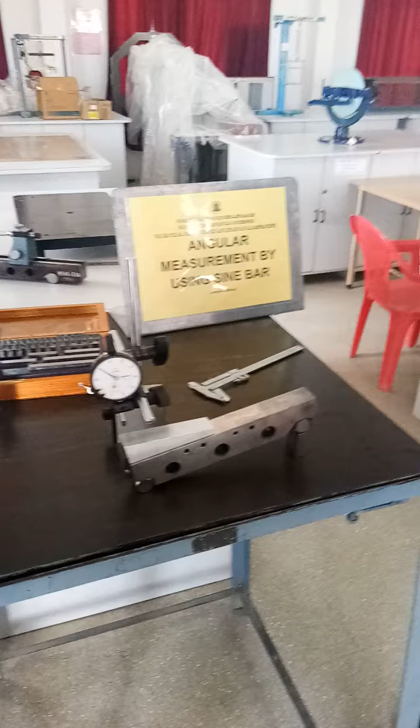Okay, so in this experiment what we are trying to do is angular measurement using sine bar. So this is your sine bar. So the apparatus required are the sine bar, the dial gauge and a wedge component. So this is the wedge component. So you can see the inclination here. So this is the shorter side, this is the longer side, but then this becomes the length.

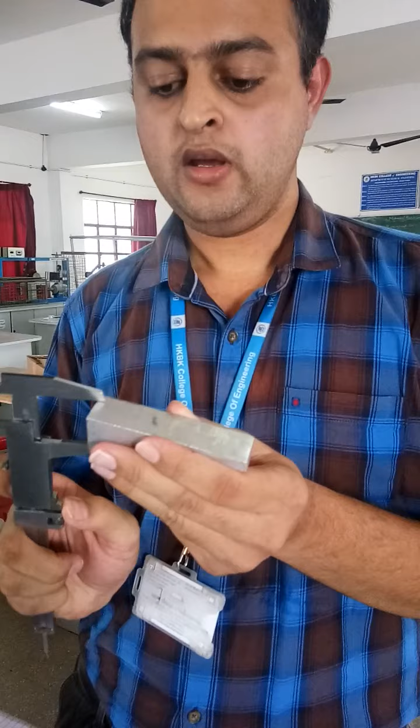So using vernier calipers I will measure the height h1 of the wedge component, h2 of the wedge component, then the length. So this is the wedge component. Okay, so this becomes my height h2, and this becomes h1 at the end. So then this becomes the overall length. So the overall length is measured. So this becomes the overall length.

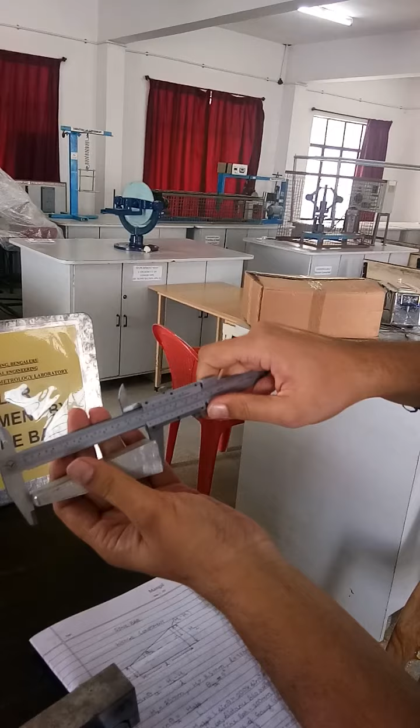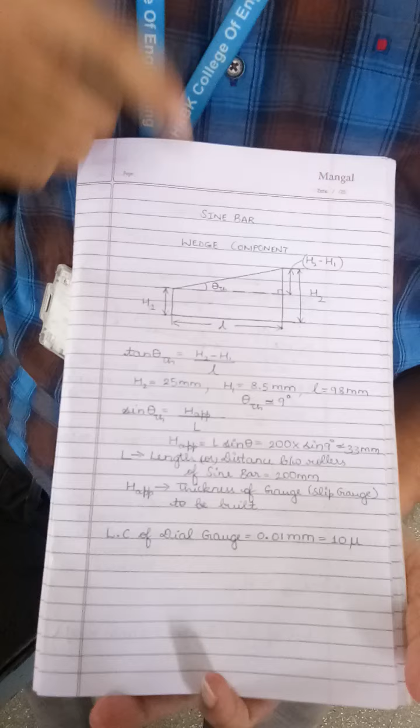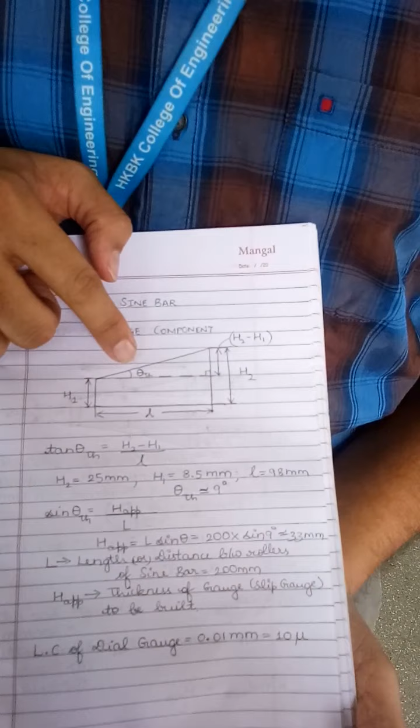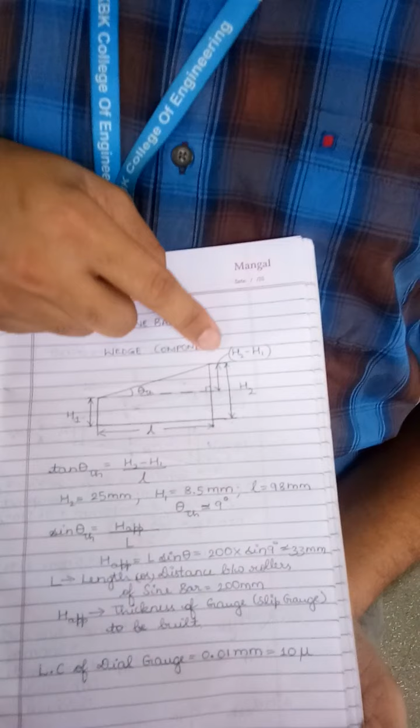So when you try to do, you will obtain the values of h2 as 25 mm, 8.5 mm for h1, and length of the specimen will remain 98 mm. So now you can see the diagram here. Okay, so the first step we are going to do is we are finding theta theoretical value. So how will I find out that? By taking tan theta. So this is right angle triangle. So this side is nothing but h2 minus h1. So opposite by adjacent. Adjacent is nothing but the length of the component.

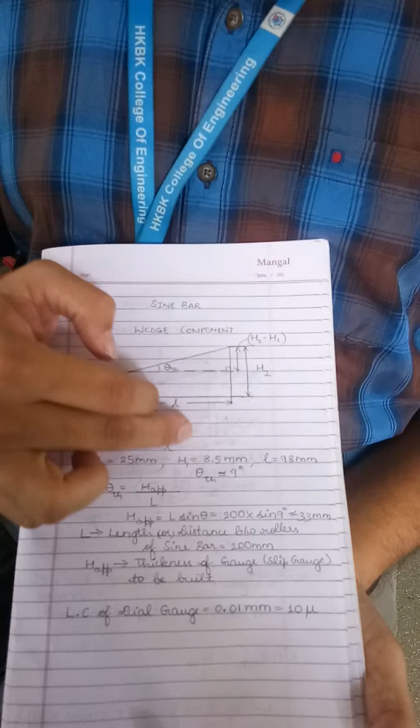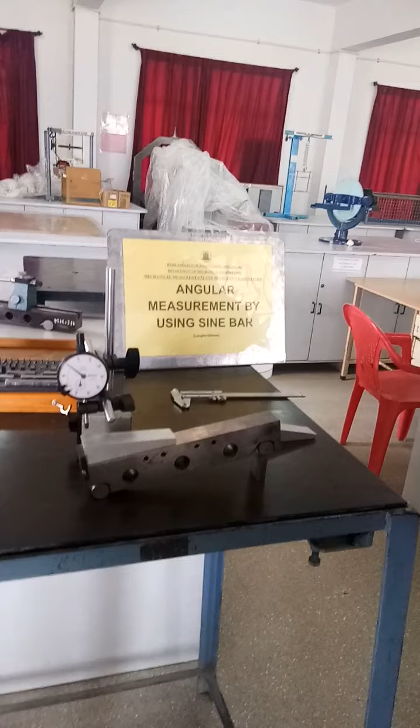So then I have this theta theoretical. By substituting all the values in this formula, h2 minus h1 by L, I will have theta theoretical value approximately equal to 9 degree for this wedge component. So now I have to verify this experimentally using the sine bar apparatus. You know that there are two rollers for the sine bar. Relief holes are provided to hold the sine bar. So you know that slip gauges are to be provided at one end to make the surface flat.

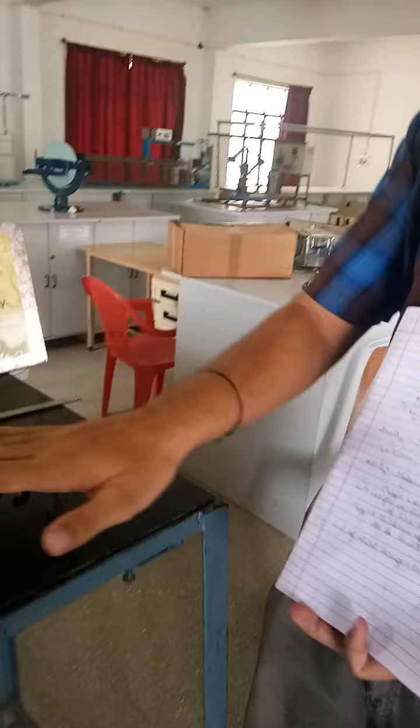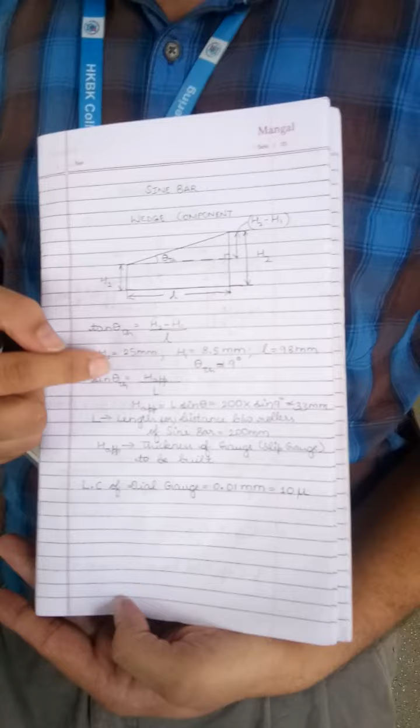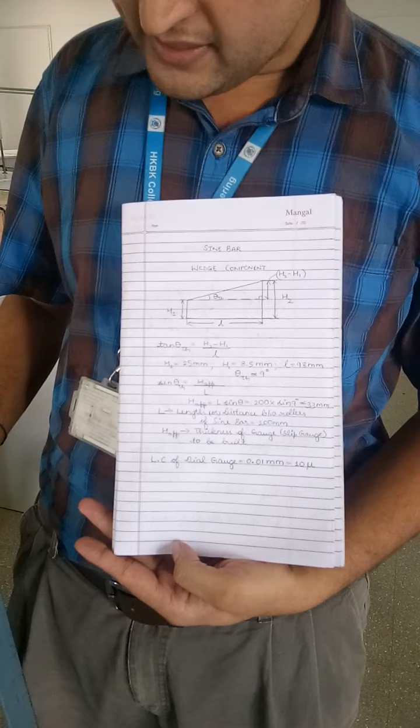Okay, then we will be using the dial gauge to check the evenness or the horizontal parallelness of the specimen. So now I have to build this h approximate, that is the approximate slip gauge thickness from the theta theoretical value found out. So now how will I do that? I will just substitute this theta theoretical value in this equation, wherein I will be knowing the slip gauge height. H approximate is nothing but the slip gauge height that has to be built.

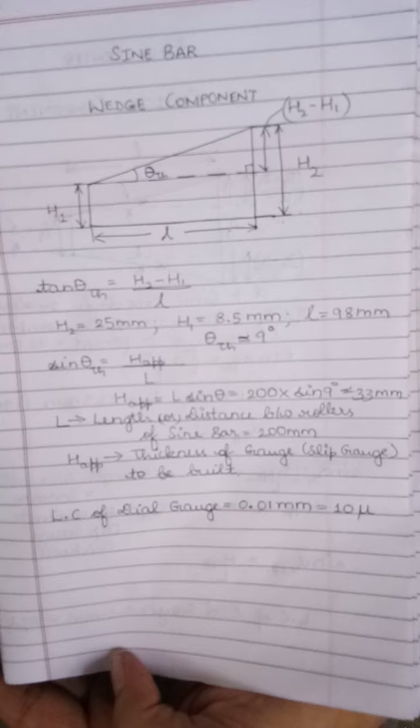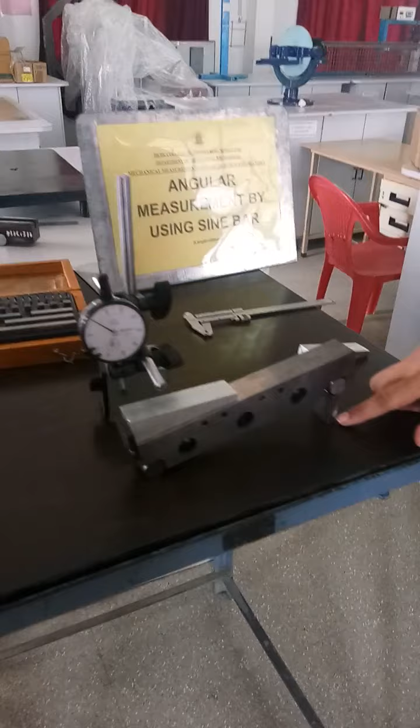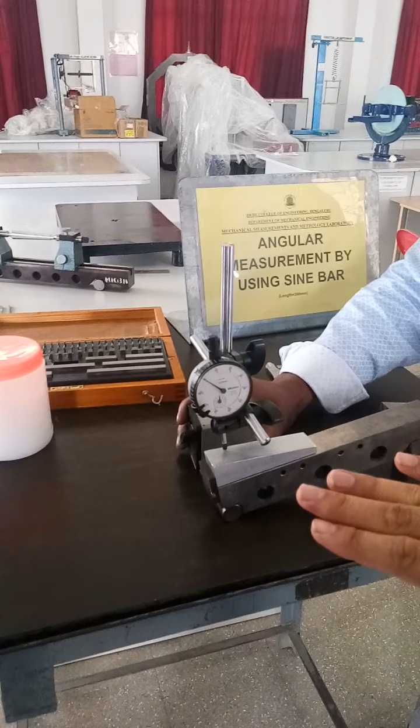L is the distance between these two rollers. So that is fixed. For the sine bar, the roller distance is 200 mm in our case. So we will be substituting that. Then finally we will get 33 mm as the answer. So we have already built the 33 mm thickness here, the slip gauge. So now we are going to just check with the dial gauge. So make sure that the dial gauge keeps running evenly on the surface and the error is between 0 to 10 divisions, so that our answer is correct.

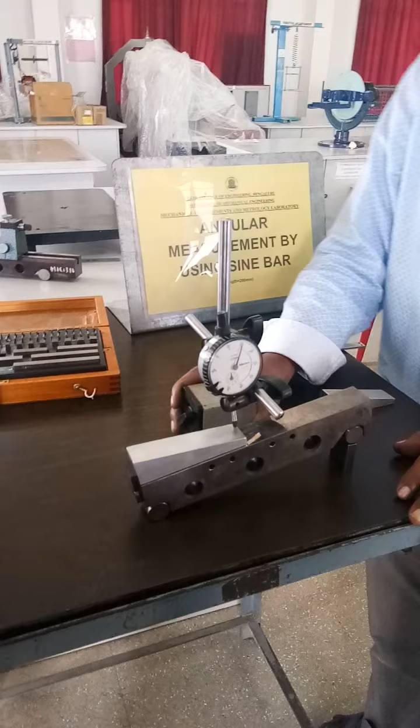So the least count of the dial gauge is 10 micron or 0.01 mm. So the reading should vary between 0 and 10. It says that our procedure is correct. Thank you.

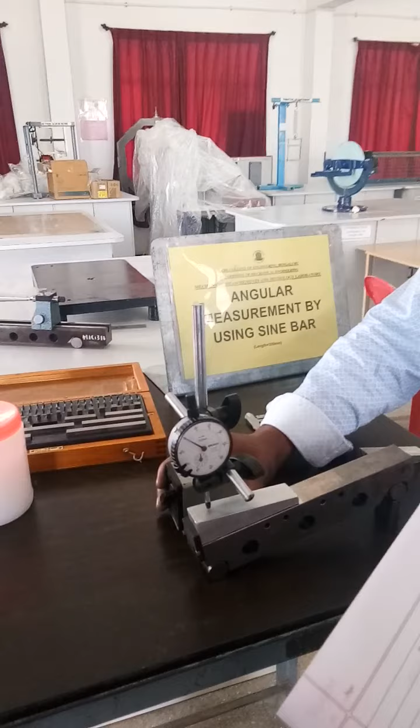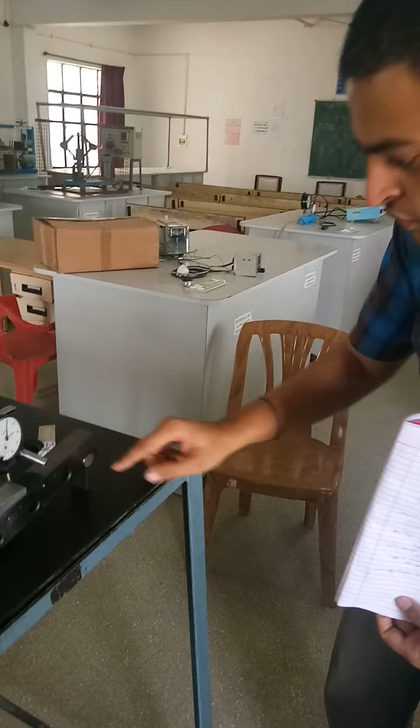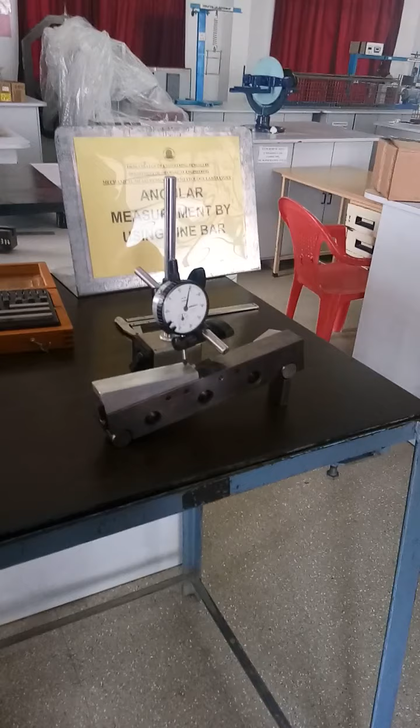We are just doing the trial and error method, so that the divisions will not go beyond 10. The deflection should be between the 0 and 10 divisions of the dial gauge. So now we have the sine bar. So this is nothing but the h approximate which we have built. So this is the angle theta. So this is how we find practically the angle theta. So this is one right angle triangle. So we can find the theta experimental from the setup once the dial gauge reading is between 0 and 10.

Okay, so this experiment is almost similar to the sine bar. So we are using the sine center. So we have a conical component, so you can see that this is the conical component. Okay, so it is circular in shape. So you have different diameters. The diameter varies. So call this side as D2 and this side as D1. So now we have this to hold the specimen. Since this is not a wedge component, it won't remain flat on an inclined surface. So we have these sine centers to hold the specimen in place.

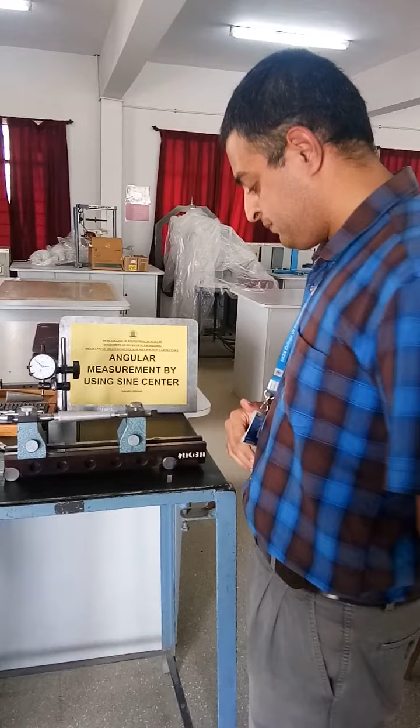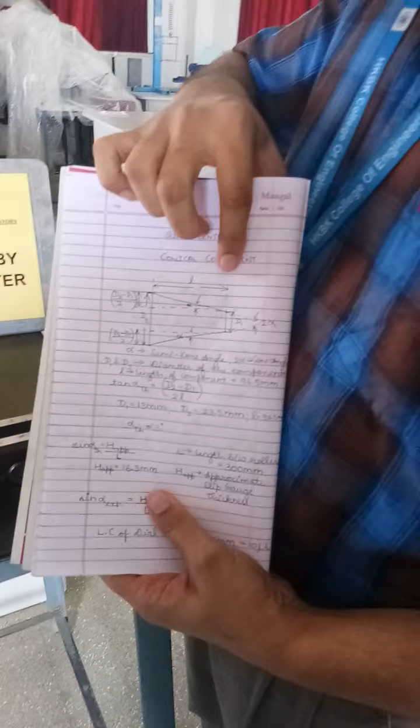So now similarly we have to first note down the dimensions of the specimen, D1, D2 and length of the specimen. Then we have to note down the distance between the two rollers. It is similar to the previous procedure whatever we have followed. So this is the conical component. L will be the length of the conical component, D2 will be the longer side, D1 will be the shorter side. Here alpha is called the semi-cone angle, 2 alpha is called the cone angle.

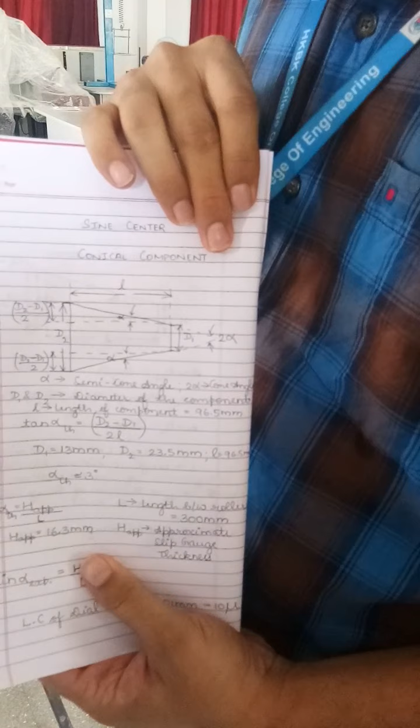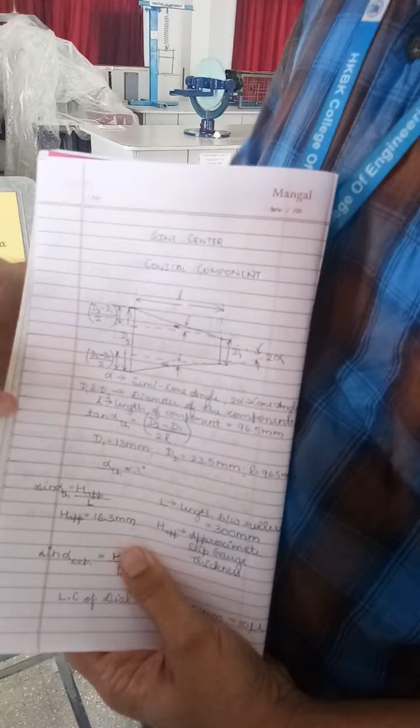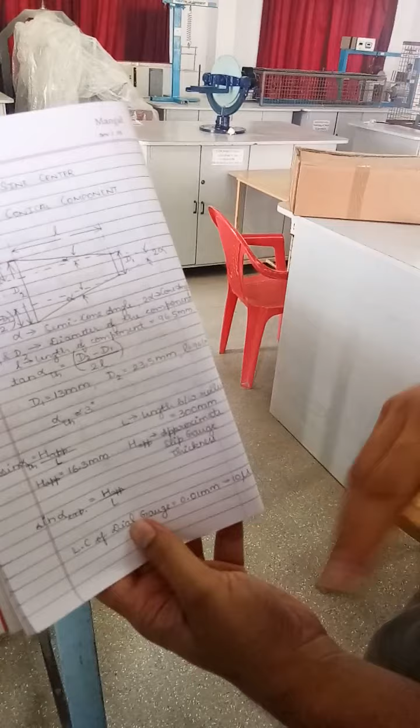So we are going to find the alpha value using tan alpha theoretical in the formula. So this side is nothing but opposite by base. Base is nothing but the length of the component. Opposite is nothing but D2 minus D1 by 2. So keeping this value we will be finding alpha theoretical. So alpha theoretical is approximately found to be 3 degrees. So now with this value we are trying to build the slip gauge thickness using alpha as 3 degree. We are going to build approximate slip gauge thickness H approximate, which is 16.3 mm.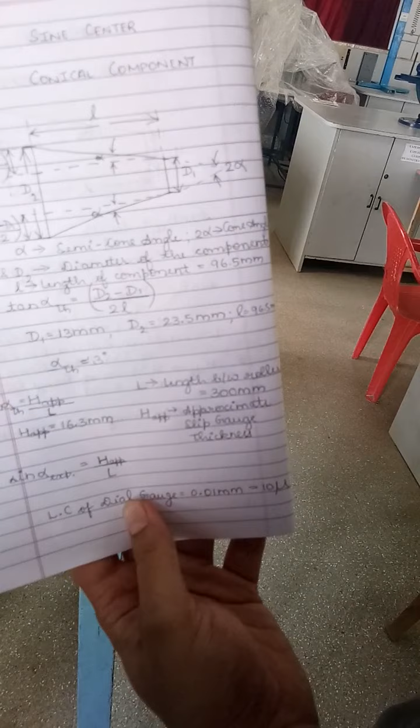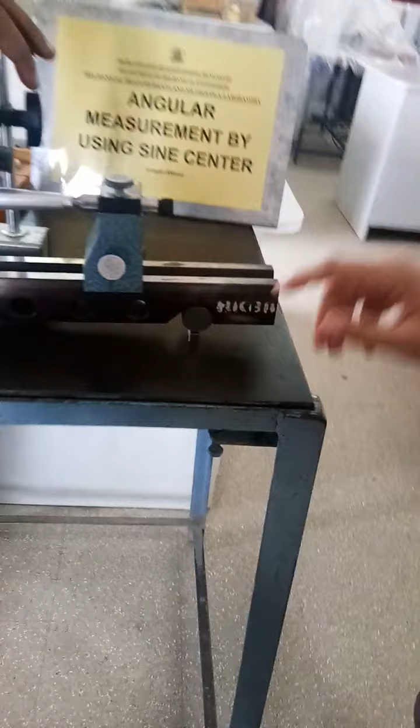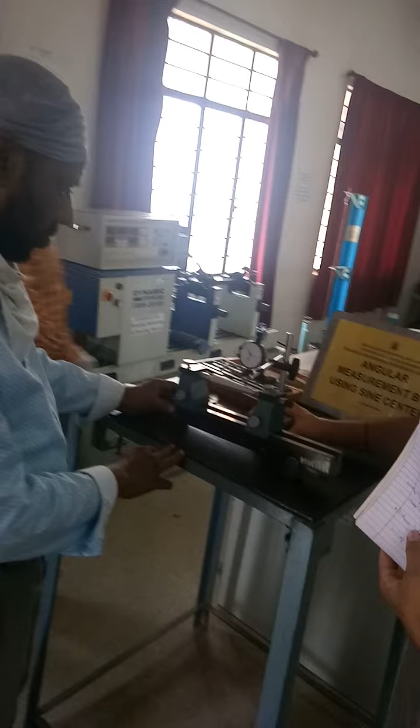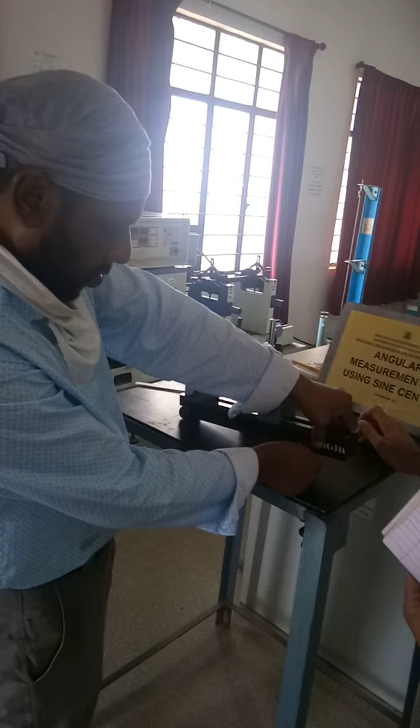The distance between the rollers for the sine center is 300 mm. So substituting that and the value of alpha theoretical, we will get H approximate, that is the approximate height of slip gauge to be built. So we have kept the slip gauge thickness, which is around 16.3 mm. So then again we have to make sure that the dial gauge runs evenly without any deflection over the length of the component. So the deflection should remain between 0 and 10. The least count of the dial gauge is 10 microns. Once we obtain a deflection between 0 and 10 divisions on the dial gauge, it means that the value we are obtaining is practically correct. Thank you.